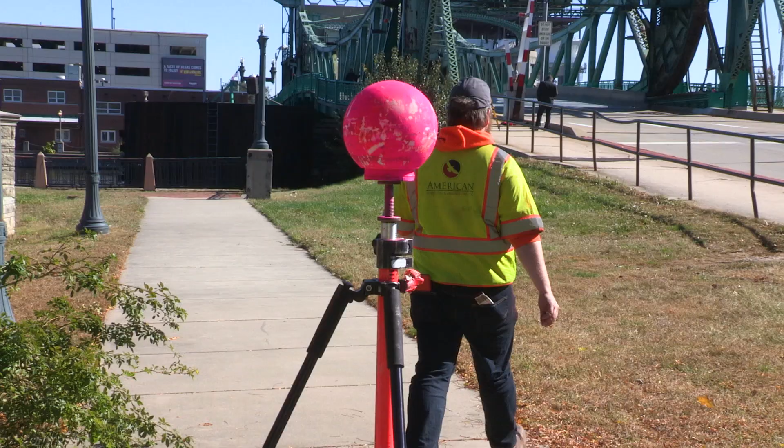Today we're out here on the Jefferson Street Bridge over the Des Plaines River in Joliet, Illinois to complete a LiDAR survey of the existing bridge structure for a bridge rehab project that they're going to be doing out here in the near future.

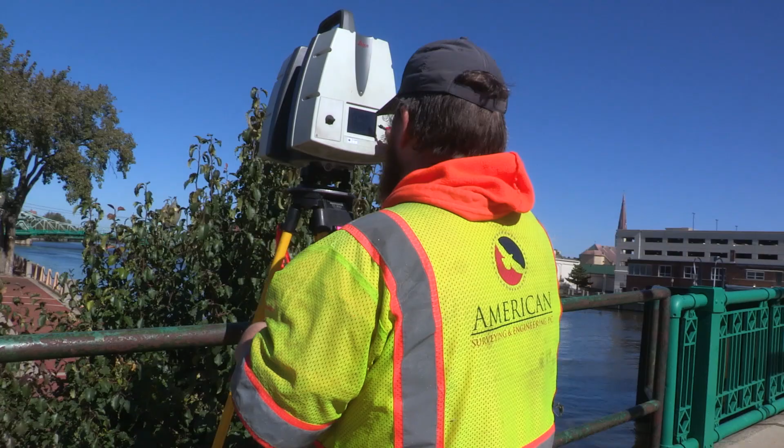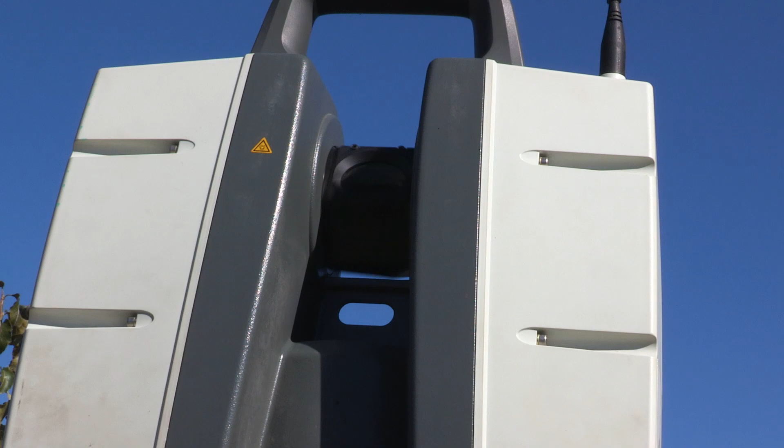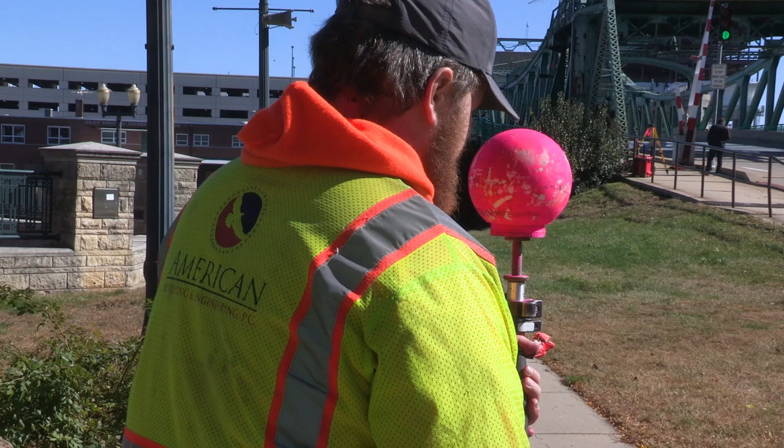We're using a Leica P40 scanner. We have a lot of targets set up all over the bridge. Some are geo-referenced, some are going to be on known horizontal control. We're running a 3D traverse and also doing differential leveling to all of our control, and take it in the office, post-process it. We're going to have a point cloud to extract all the key features that are needed by the clients. They're going to be doing rehab to the bridge. They're not going to be replacing it, but they have a rehabilitation project.

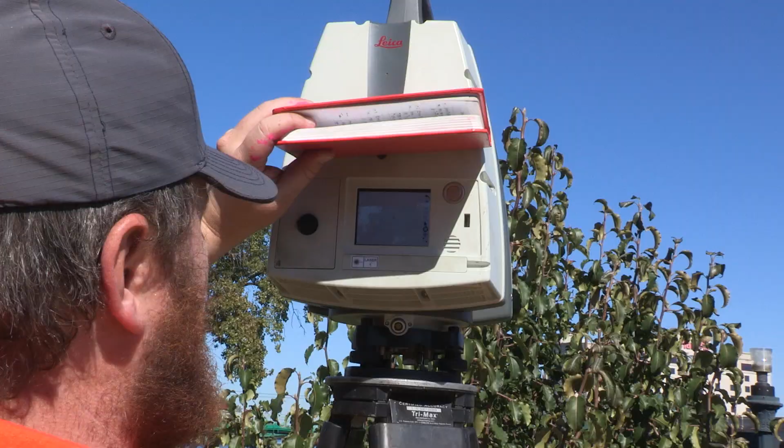Their primary interest is the track and the track plates along the bascule arm of the bridge. We're going to kind of see how it turns out. They're a little greasy and they're a little wet, but hopefully get some good data on it. And today we're going to talk about how we just go about collecting this type of data, how we're going to work with it, what we can take out of it, and why it's advantageous to use.

Our clients span both public and private. Quite a few public clients, including IDOT and the Tollway. Tollway is a large client of ours right now. We're currently the SUE provider for the Illinois Tollway.

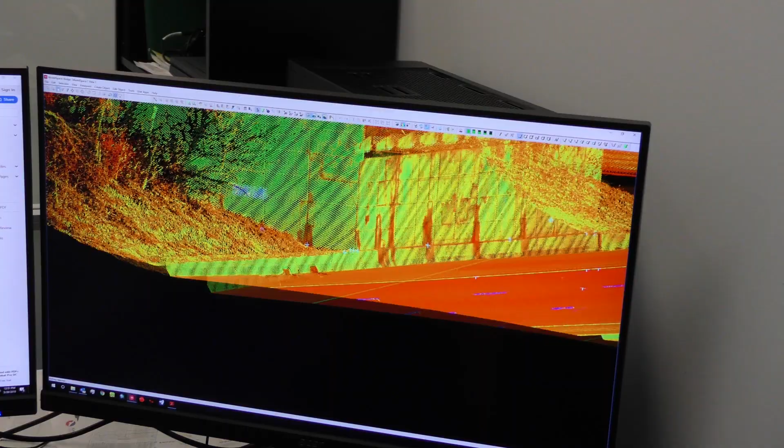And you get into an urban area like Chicago, there's stuff everywhere. A lot of the utility companies, they're getting much better at it, but a lot of the utility companies don't know where their facilities are at. This is their assets. Sometimes we run into some base information that they don't even know what side of the street that they're on. So there's definite worth in paying for the SUE process.

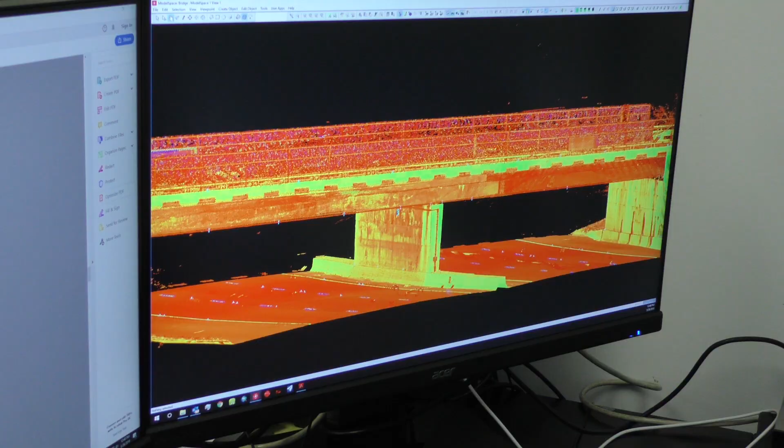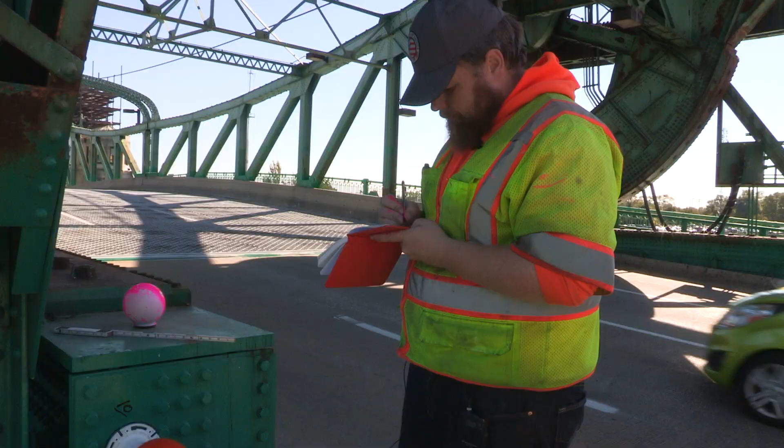Part of the advantage of the LiDAR system is that it's giving you a 3D cloud. Everything that the scanner can see from its position, you're going to have a data point on. For example, on this site, you've got a lot of traffic. You're on a moving bridge, there's shipping traffic, there's just regular car traffic. It's not easy to get up on that structure to take measurements, to verify locations, sizes of different beams and girders.

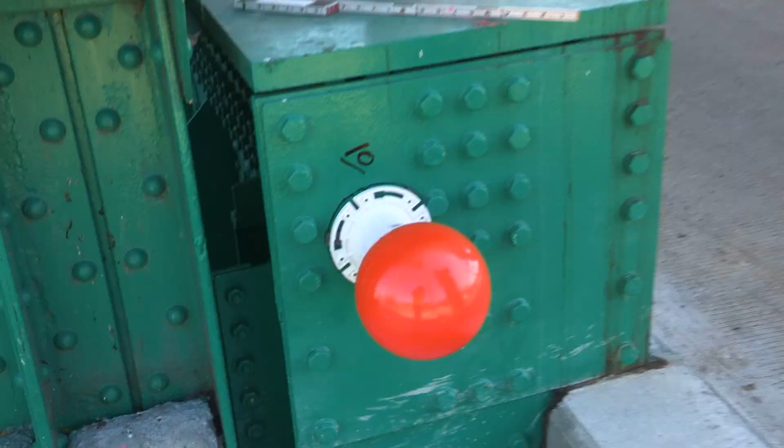What this allows you to do is take this 3D world into the office, and you can pick and choose what you need, where you need it. You don't have to send a crew back out to the field if you miss something. You just got to open up your cloud data, you can take those measurements, and you can extrapolate any information that you need. The real advantage is not having to come back out. It's going to save you time, it's going to save you money.

The way that technology is progressing, everything is moving into 3D models and 3D modeling. This is a tool that's going to give you everything you need to make as-built models and then pre-designed models as well.

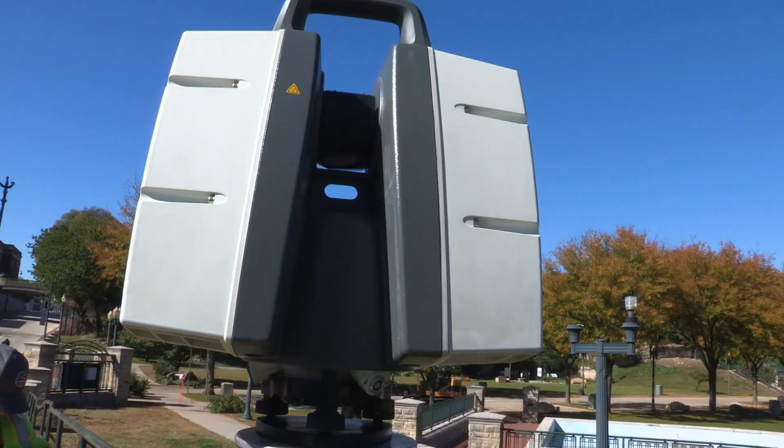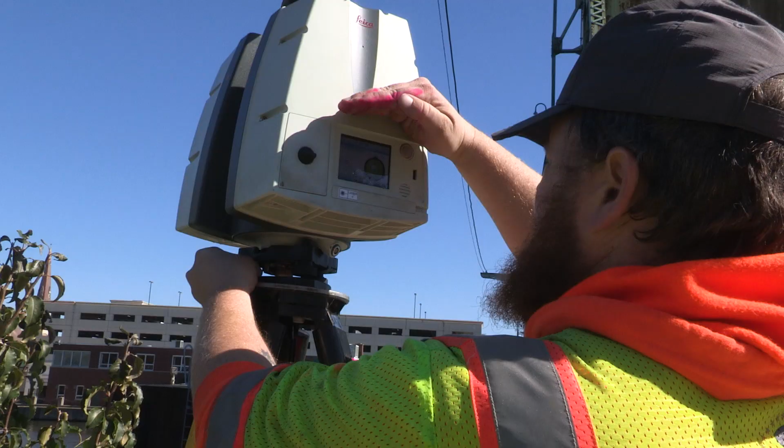Typically in subsurface utility engineering, all of the latest surveying techniques are used by our organization. So we use kind of a combination. Primarily we use GPS, secondarily we'll use a total station, but then we can also use LiDAR in some situations.

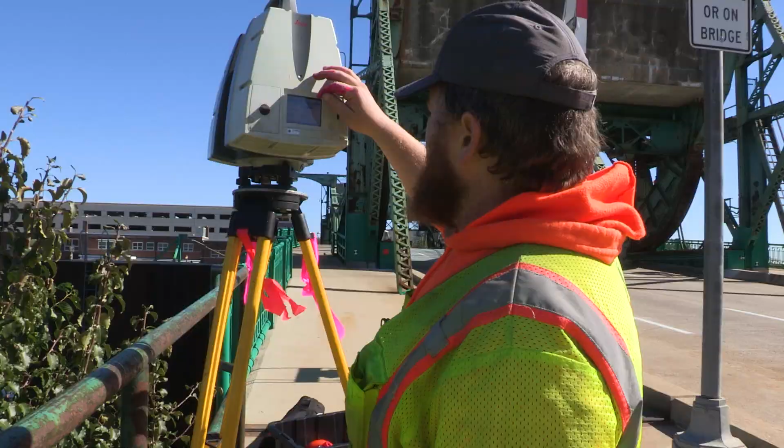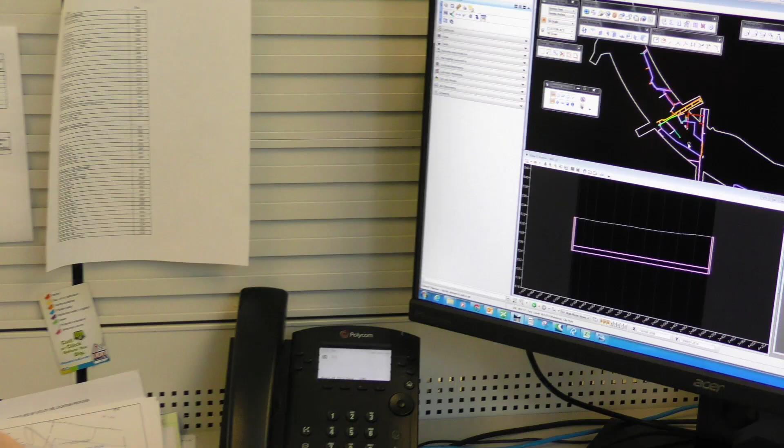LiDAR is really helpful for us when we're in a situation where we need to capture the topography information, but it's difficult for us to go out and capture that information. So what we'll do is we'll have it attached to a van, we'll drive through that area, collect that information, and then the real work happens on processing it on the back end. We're able to collect the information very quickly, and then we spend more time on the back end, but we're not putting our workers in a hazardous situation to collect that information.

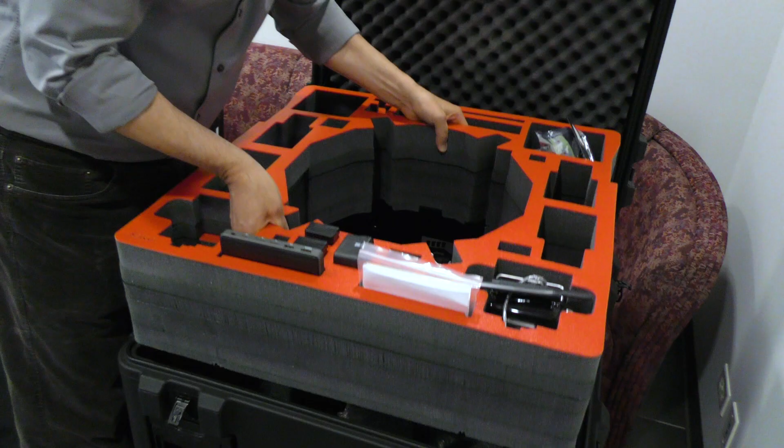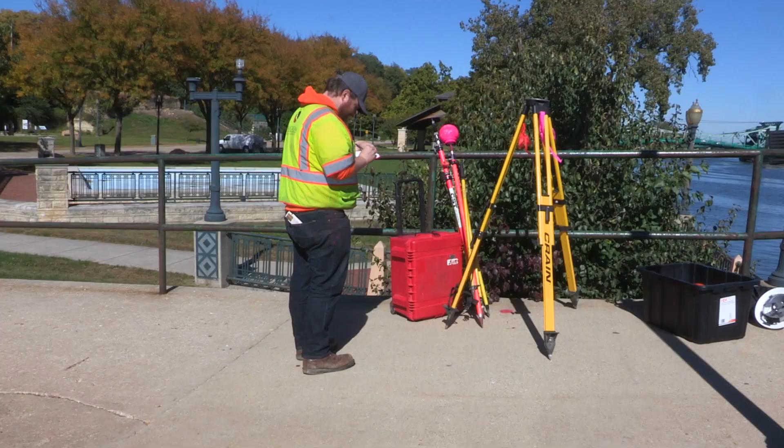The reality is that, if you're not testing out new things, you're going to be doing the same thing you've always done. And the more work we can complete in a day and the more accuracy we can have, it's going to make us more competitive in the market. So we're constantly looking at ways we can make ourselves and our workflows better.

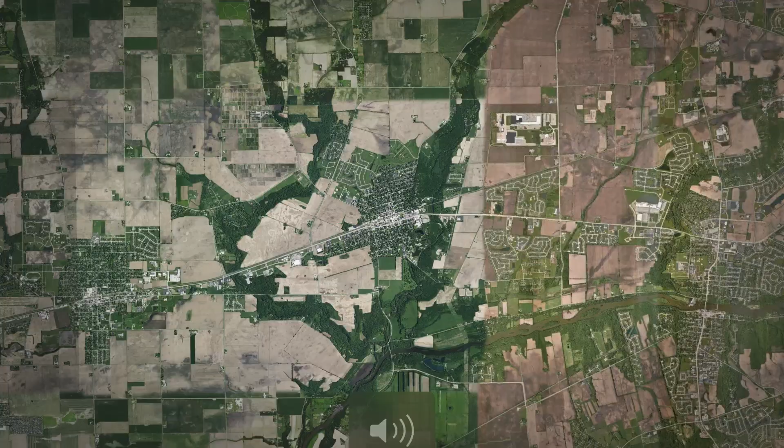We have done some interesting jobs with the scanner. We were contracted out to do the Superman movie, the first one that they came back with. We scanned the farmhouse in Plano over here because that's where they did the farm shooting. We scanned the farmhouse and the silo and the barns and stuff, and they modeled that so they could blow it up in the movie. That was pretty cool. We did Comiskey Park when they wanted to see if they could fit a football field inside the stadium so they could play a Northwestern game there.

So we went out there and scanned to see if they could drop it in. They really could not, unfortunately, so it didn't happen. We did an architectural scan on the Chicago River at Michigan Avenue, the Wrigley building, the Wrigley staircase down there, because they're rehabbing it. So we scanned all the stones, and that way they were able to put every block back where it was so they could match the original staircase exactly.

We've used the P40 to scan the breakwater out in Lake Michigan and combine that with underwater multi-beam data, so we have a full 3D model of below surface and above water site conditions. You can pretty much do anything - pipe work, go into construction sites for their piping. Anything else you need, you just open up that cloud.